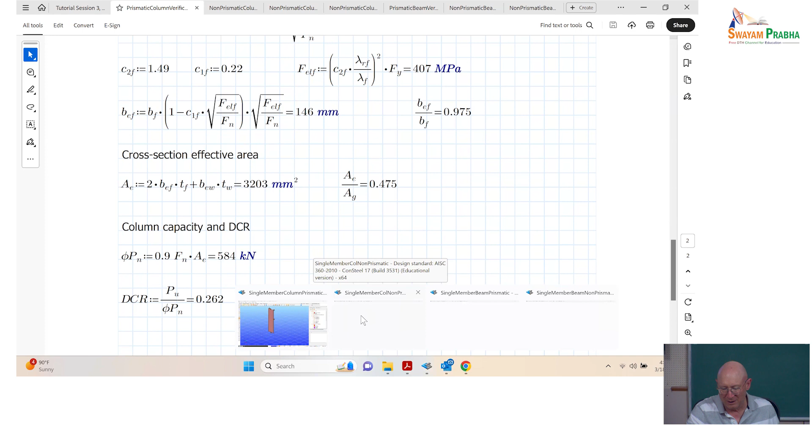So let's do the non-prismatic column. Balint is going to show later how we can introduce a taper, but I can go to a function and say I want to make this web tapered from one dimension. In this case, it's 300 millimeters total depth at the bottom, linearly tapered up to 1,000 millimeters total depth at the top. But then all the other cross-section dimensions are what we just did.

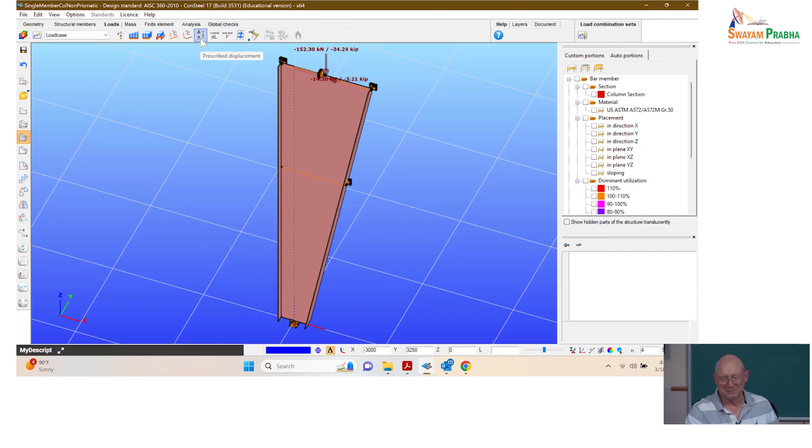So what do you think? Do you think the flexural buckling out of plane on this is going to change significantly? Any bets? Now you can see up at the top, just to make sure I had a concentric axial compression along the inclined centroidal axis, I gave it a component x and z for the applied load at the top. What do you think? Is the buckling load going to be larger, smaller, or the same? Larger. Larger. Let's see, so we'll run it.

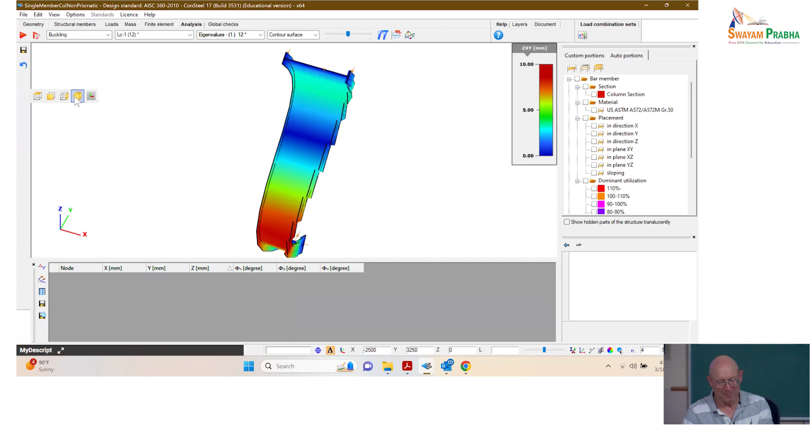Buckling: 12. It was 11.97 before. But what's 0.03 among friends, right? Let me pick the right one there, and we tone the S shape down a little bit. Pretty much the same sort of buckling that we were just looking at, right? It's just now it's got a tapered web depth.

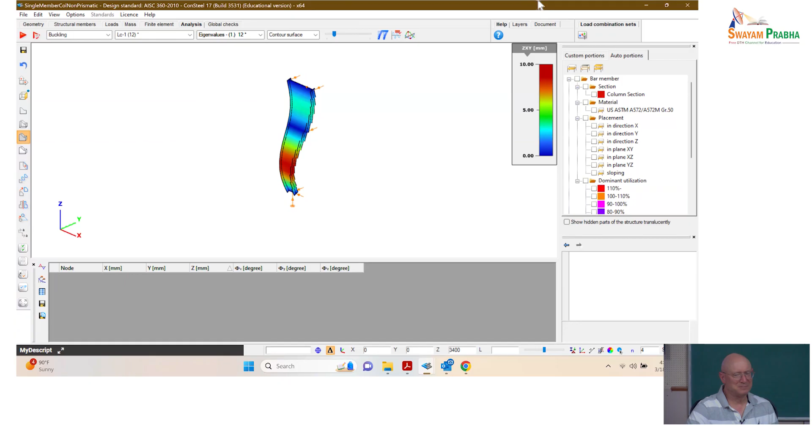Okay, so elastic buckling is pretty much the same. So now let's go to the non-prismatic column top verification. All right, so we can do this one really quick. If you pull up that file, non-prismatic column top verification, everything kind of looks the same because I'm doing the top.

Now remember the concept that I pitched to you that we're using in Design Guide 25, the AISC MBMA Design Guide 25, and we're using this concept also with some of the things moving forward to promote non-prismatic member design verifications in the 2027 ballot 2.

The idea is, suppose that you are doing a buckling analysis to verify your design on some structure that had several columns. Now, if you apply the load and do the buckling analysis, you can say, well, what's the load in each of those columns at buckling, right? That's your P critical, or your PE, if you like.

All right, and then you'd say, okay, now I'm ready to check each of those columns. I can say, well, what's the cross-section demand, a PU to a cross-section strength? We'll talk about that here in a bit. Actually, let me come back — it may be good to talk about that here if I don't have it there. Okay, we'll come back to it over here.

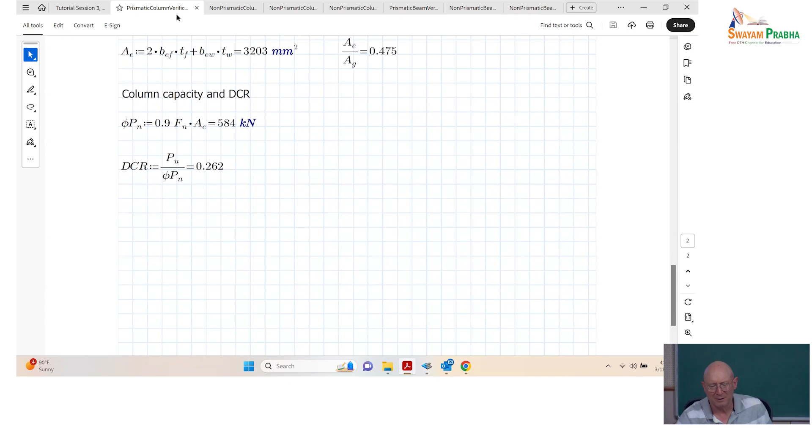So for each column now, I've got an elastic buckling load, I've got a PU, and I've got some sort of a cross-section strength that I can quantify in terms of axial load. If you've got all those, you've got everything you need to determine a PU over PN, the design demand to capacity ratio for the member, for each member.

So what are we doing when we have a non-prismatic column check? We're simply saying, okay, I've got this cross-section up there, I've got this buckling load — let me treat that cross-section. I've got my PU to cross-section strength at that cross-section, and I've got an elastic buckling load level, or a gamma E if you wish.

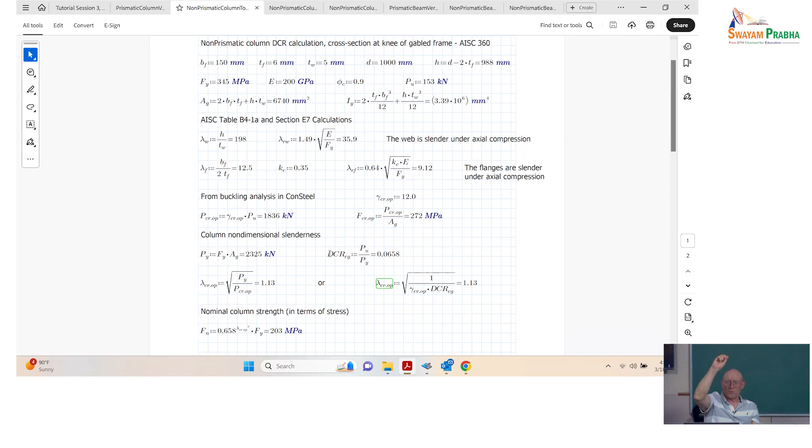And so now I treat that cross-section as if it's a member, and say, okay, I go to the spec and say I want to know what the strength is of an equivalent prismatic member that has that cross-section, that PU, and that gamma E, or gamma critical. Okay, well, I've got that one, and I can move down — let me check this other one down here.

And so generally, in Design Guide 25, it basically says here are several locations that you should check, and you look for whichever one gives you the largest PU over PN. Well, it's just like your column design when you design multiple columns in a building — if you're checking all axial loads, you'd check them all and say, oh, that column over there is most critical. So you're just treating a non-prismatic member like multiple columns.

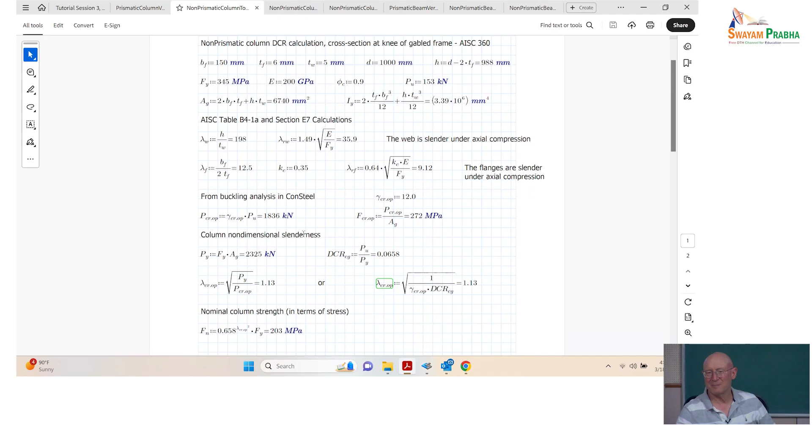Okay, so we went to the top here, but the top cross-section is the same cross-section we were just working on. So nothing changes, except our gamma critical is 12 instead of 11.97. Everything is practically the same all the way through the bottom. So we've got our checks getting down to our demand to capacity ratio here, pretty much the same to 3 significant digits.

All right, so then now here I'm showing a cross-section check. Now what we came up with and worked with Balint and his colleagues at Consteel — and they implemented it in Consteel — okay, can we identify what the most critical cross-section is?

So one way of doing that, it's not exact, but it gets you a reasonable estimate in general. We basically say, okay, let's do it the same way Eurocode does. We're going to calculate effective widths based on yield of the plate. So that's what you see here.

You see you're getting smaller effective widths because you're taking it all the way up to yield. Let's get an effective section for the S for section. That would be my effective section if I were taking the cross section all the way up to yield. Then I can see now effective area over gross area, my goodness, that's less than 50% of the gross area. This is crazy. And then I can do a phi PNS for a cross section, 0.9 FY times effective area.

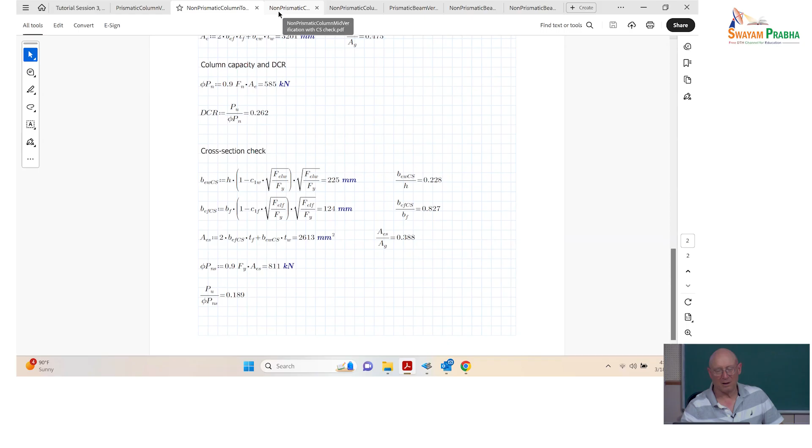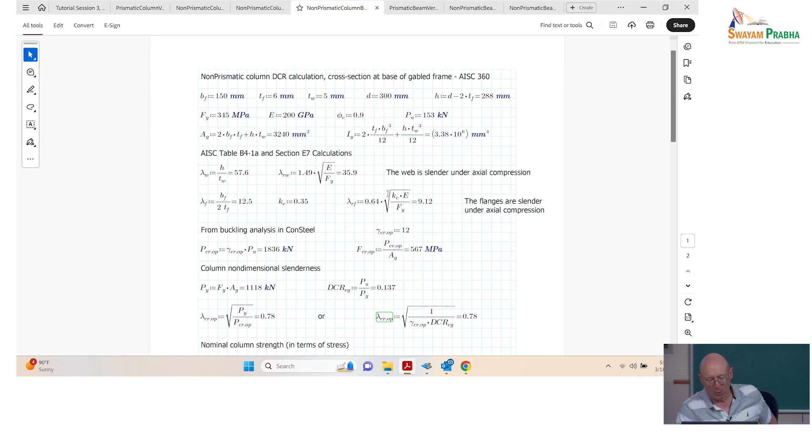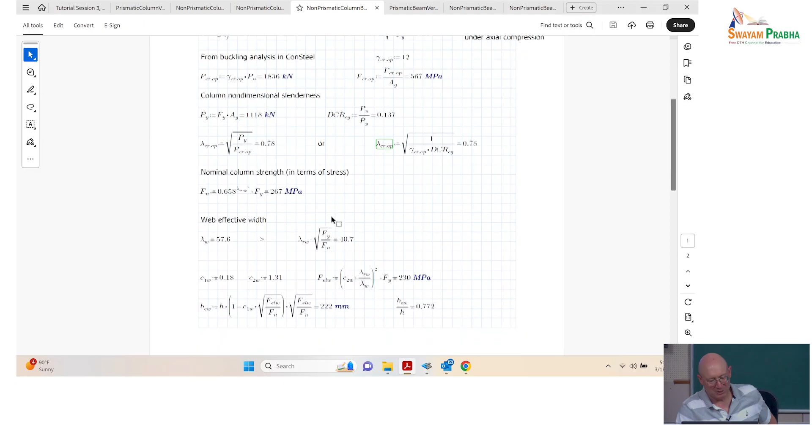Okay, so again, if we're using ConSteel, we would just go straight to the bottom. So I went to the bottom here, and now at the bottom, D is just 300 millimeters. That changes, but everything else is largely the same. The gamma critical is 12 for the out of plane. We just carry everything through. The calculations are exactly the same, but we're doing it with a total depth of 300, and we get 0.233 at the bottom.

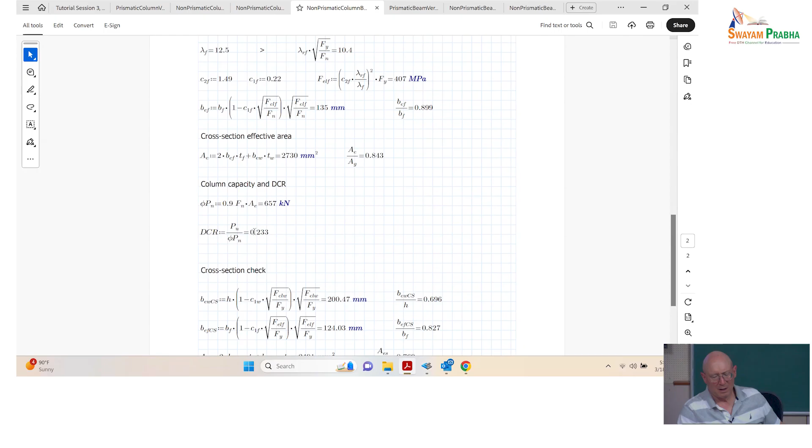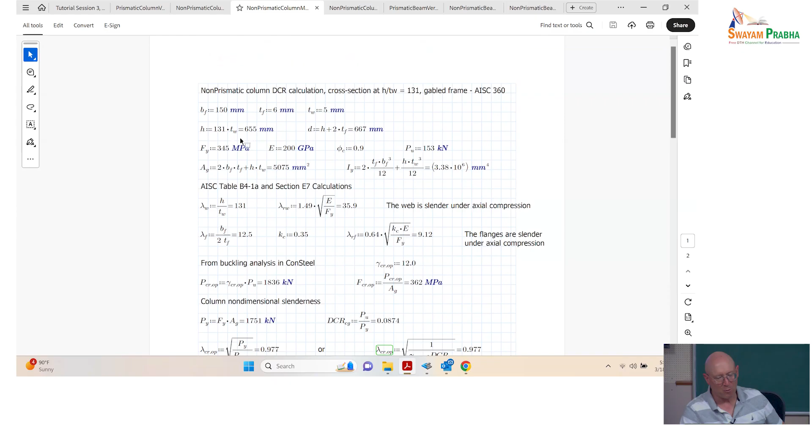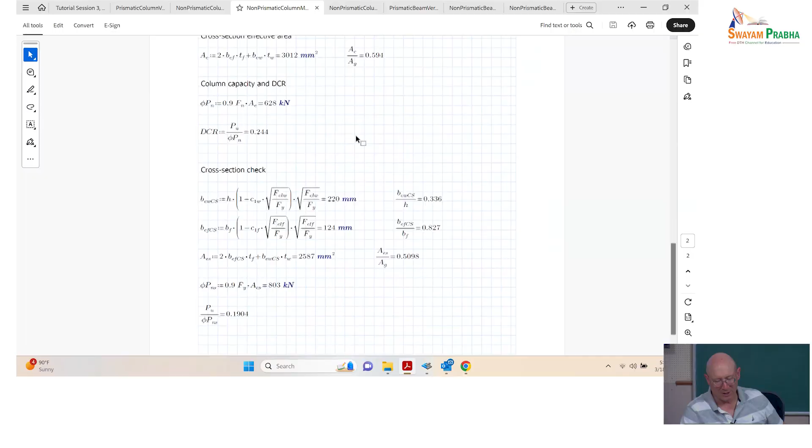And so in Design Guide 25, we'd say, okay, well, that one wasn't the most critical. We'll use the section at the top. But generally, we need to check also in Design Guide 25 where H over TW passes through 131. So I did one other check for an intermediate point where I said H is 131 TW. What's the depth? So let's check that particular location along the length. And when we do that check, same calculations, okay, 0.244, that's a little bit larger.

Did that confuse you? So that's the column checks. I see some frowns. Yesterday you were all nodding yes. We're good? Okay. All right.

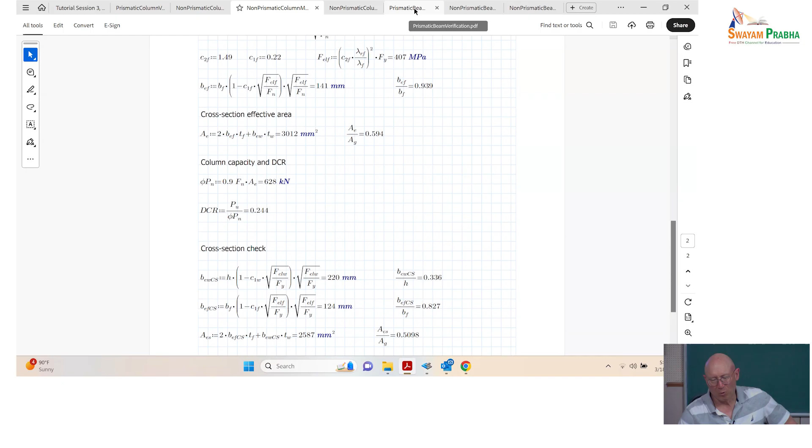Now to wrap up this session, I want us to talk about the beam checks. So if we're wanting to get a demand to capacity ratio for flexure, it's very similar concepts. But of course the equations are different.

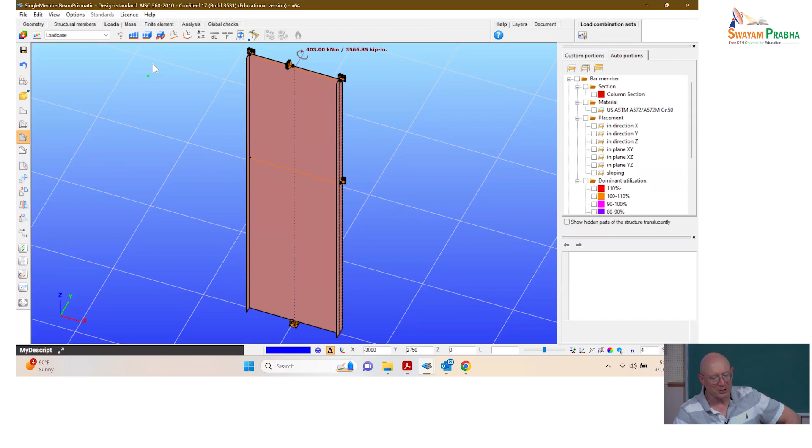Let me see if I pulled that up. Yeah, I've got it. Single member prismatic beam. So I've got 403 kilonewton meters applied as a moment at the top, same geometry, basically using the cross section at the top. We can run the analysis, look at buckling, on the buckling mode down there a bit.

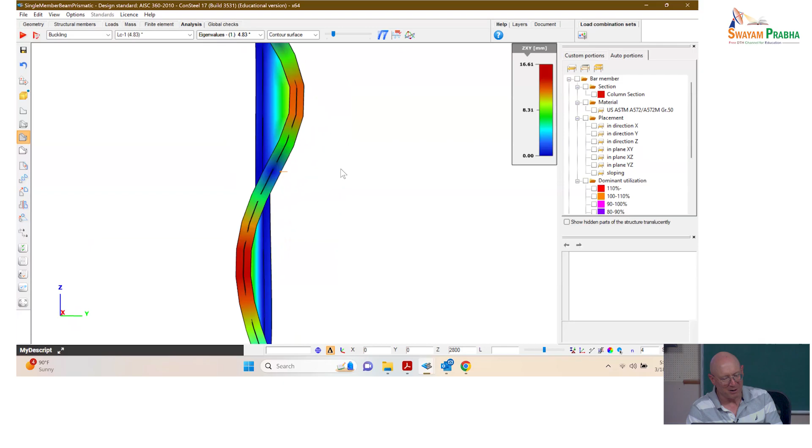So what's going on here? Which flange is in compression, in flexural compression? The one to the right, correct? We can see that, here we've got a moment diagram that's varying from maximum at the top linearly to 0 at the bottom. So we've got high moment up in that 1.5 meter long top segment, and then smaller moment in the bottom segment.

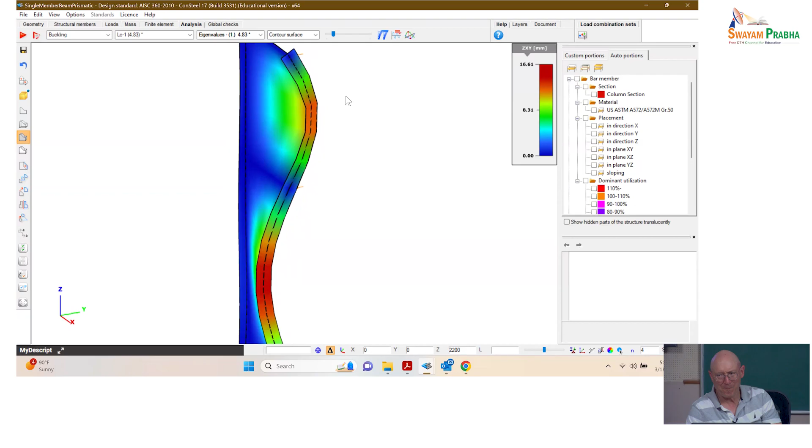And the eigenvalue here is 4.83. So we're going to take that in a kind of similar concept.

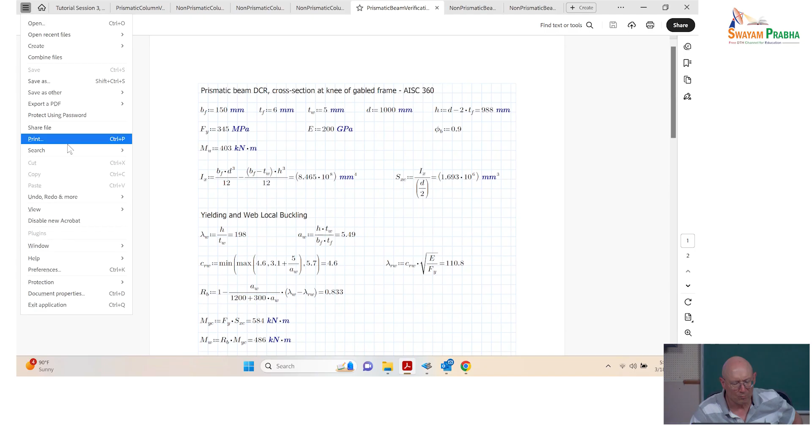If you're guessing that the critical cross-section for bending is probably at the top, that's a pretty good guess, and we could do multiple checks. I think I actually put in one non-prismatic beam. Oh, that's non-prismatic, this is prismatic. So yeah, clearly the maximum moment is at the top. It's the same section throughout, and the top cross-section has the biggest cross-section demand, right?

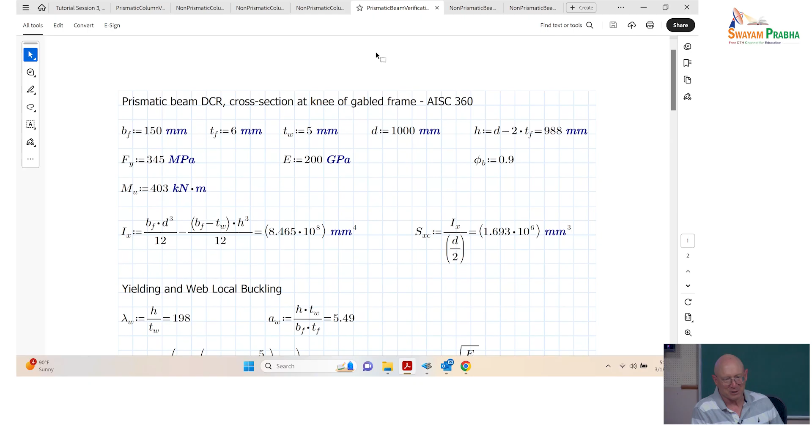So we're just calculating a few miscellaneous parameters here: moment of inertia, elastic section modulus. So now getting into the flexural provisions that I shared with you yesterday.

So this is doubly symmetric again, and so H sub C is equal to H if it's doubly symmetric. H is the distance between the insides of the flanges for a welded section, so 198 again. Then we have an A sub W parameter that, in this case, gives the ratio of the area of the web to the area of the compression flange.

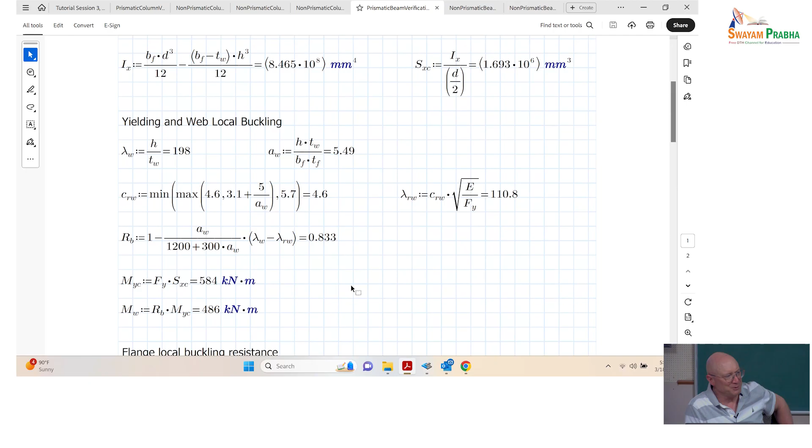So that's 5.49. You think that's a big number? 5.49 is a very big number for this, this is a huge web. Dr. Galambos used to call these webs with top and bottom stiffeners. There's a small flange with this huge, deep, slender web. Okay?

What's that? Galambos, the Hungarian. Galambos, yes, as a proud Hungarian, Dr. Vasilievich, did I say that fast enough to get through it? Vasilievich, yeah, right. And I screw up all your Indian names too, I'm sorry. Anyway...

From Dr. Lakshmi Priya's work, we recognize that once we're getting into some of these sections, the slender web, or the non-compact web limit, where it goes from non-compact web to slender web for flexure, or class 3 to class 4 if you're thinking more in terms of Indian standard or Eurocode standard, it's the very small flange, very large web tending to be damaging, and we need some reduction in that.

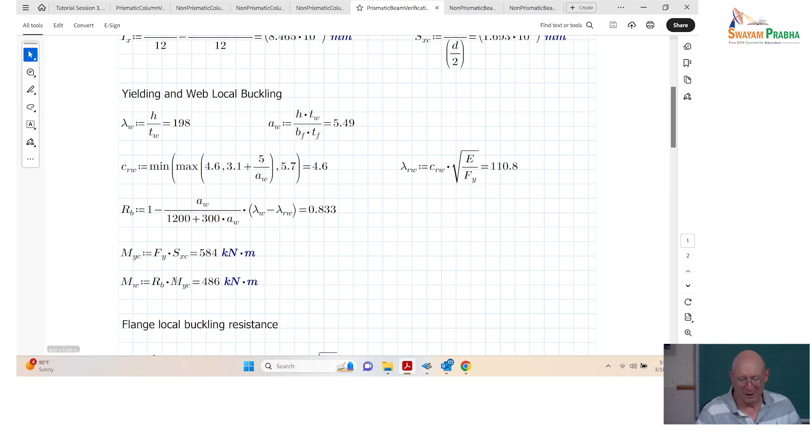R sub B in the new provisions is essentially the same equation as what's listed as RPG in the current 2022 specification that you have. PG was for plate girder, and then we basically said, oh well, you could have a plate girder that's got a really stocky web, so why are we calling it plate girder? It's a slender web member. And Dr. Yura and Dr. Galambos would never let us change that because people are used to seeing RPG, but I managed to sneak this in when nobody was looking, in the latest version of the ballot for AISC.

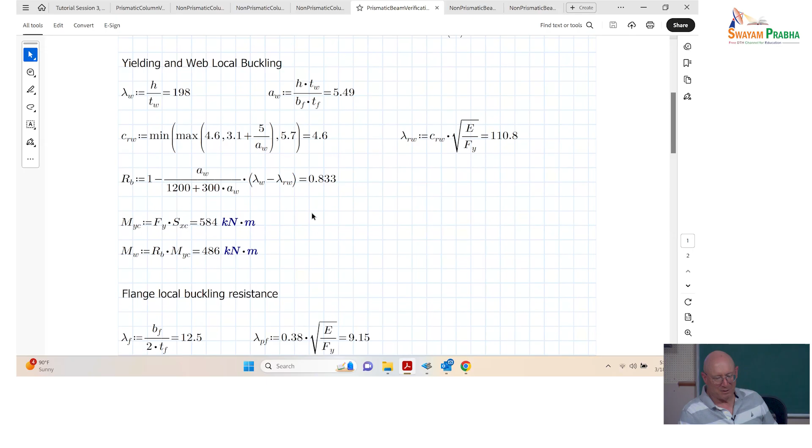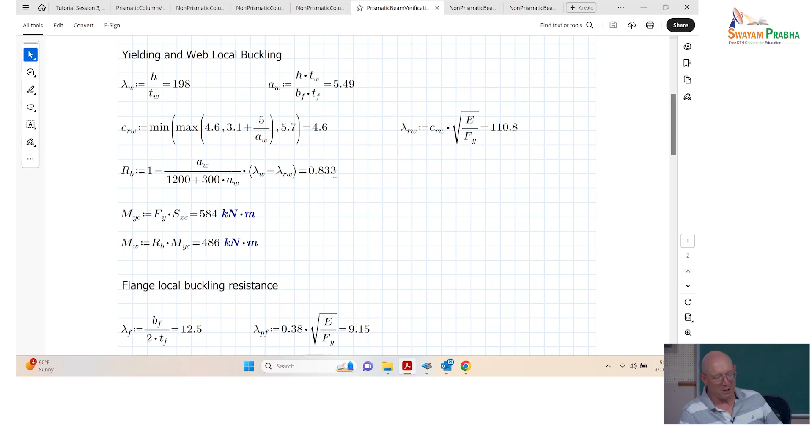So the reduction on the yield moment accounting for post-buckling strength of the web here is 0.833. So that's a fairly large reduction, relatively speaking, but it's a very thin web.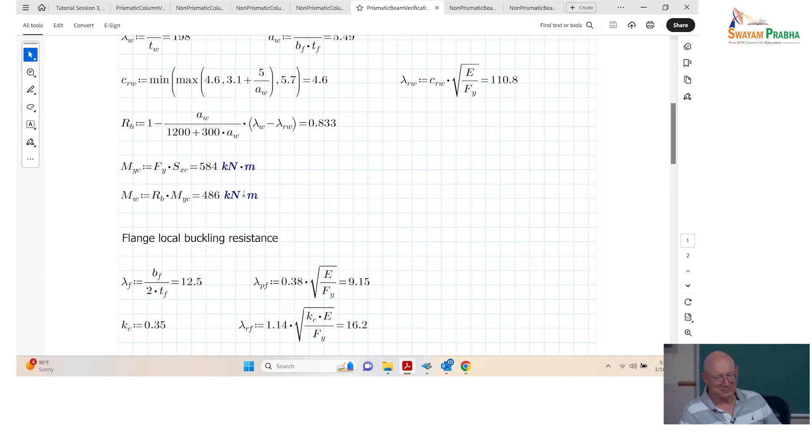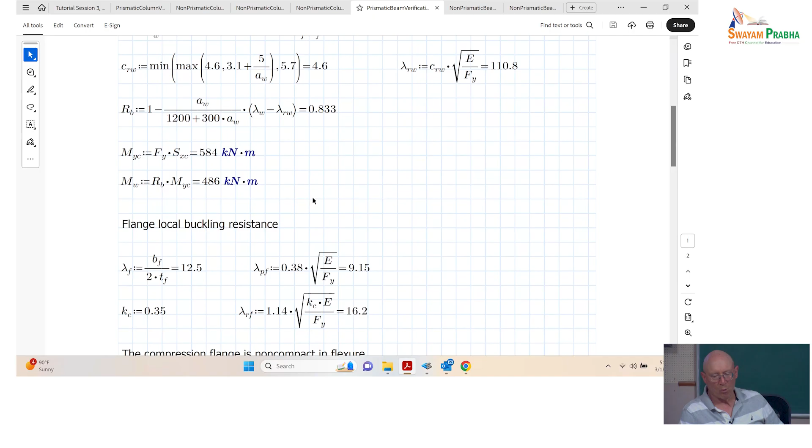We can calculate the yield moment to the compression flange, and then this term M sub W is kind of like a cross-section strength. It's called the strength considering yielding and web local buckling. So here, that's what it is, yielding and web local buckling. The web local buckling and post-buckling is captured through RB, and so that's your so-called plateau strength. That's the maximum limit that we can use in our design. We reduce from that when we look at lateral torsional buckling or flange local buckling.

All right, so now we need a flange local buckling resistance if this flange is class 3 or class 4. The compact limit in AISC, which is equivalent to class 2 in Indian code and Eurocode, we take 12, that would be 12.5 for this case. No, that's actually the actual B over 2T.

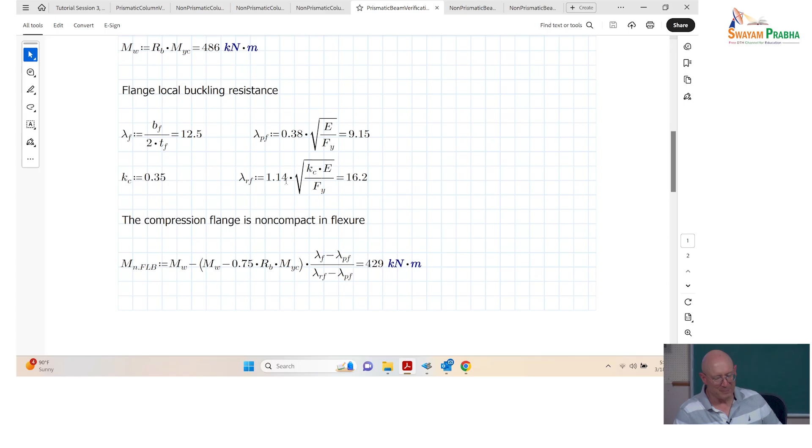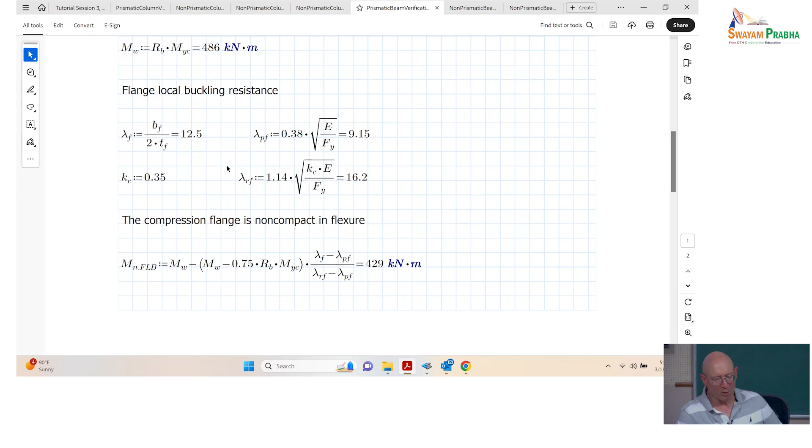The compact limit is 9.15, and so we're exceeding the compact limit, but the non-compact limit is given by this equation for flexure. KC is 0.35, that's 16.2, so we basically have a non-compact flange, or essentially class 3 in Eurocode or Indian code. And so the equation that is moving forward in the ballot at AISC for the flange local buckling strength is what you see here.

It's basically a linear reduction all the way out. There is basically a check that you'll never practically reach, where you basically say I'm not going to allow that line to go less than the elastic buckling strength, but you'd have to have something really, really silly before you'd ever get there.

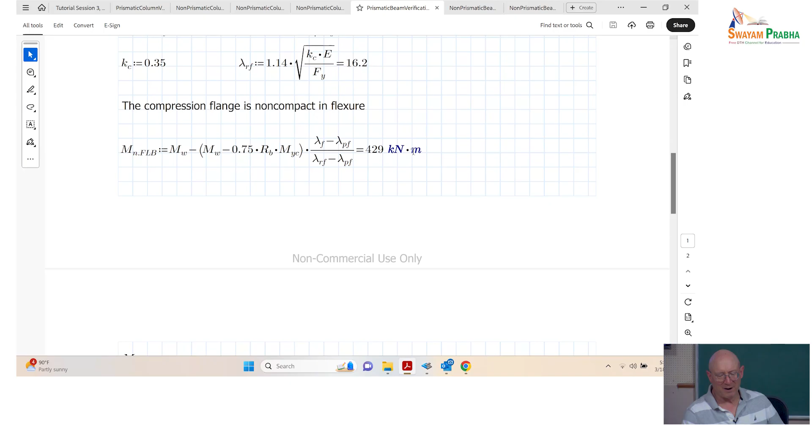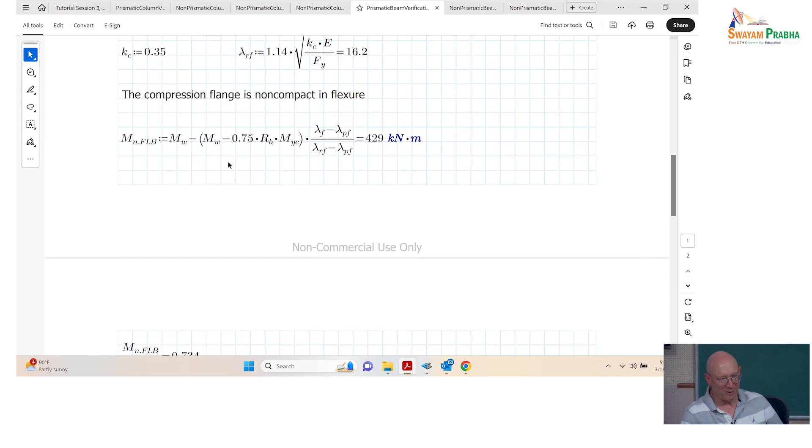So 429 is the flange local buckling resistance, and that gives some accounting, in a very simplistic way, for post-buckling strength of the flanges in flexure. You can see we're at 0.734 of the yield moment at the flange local buckling strength.

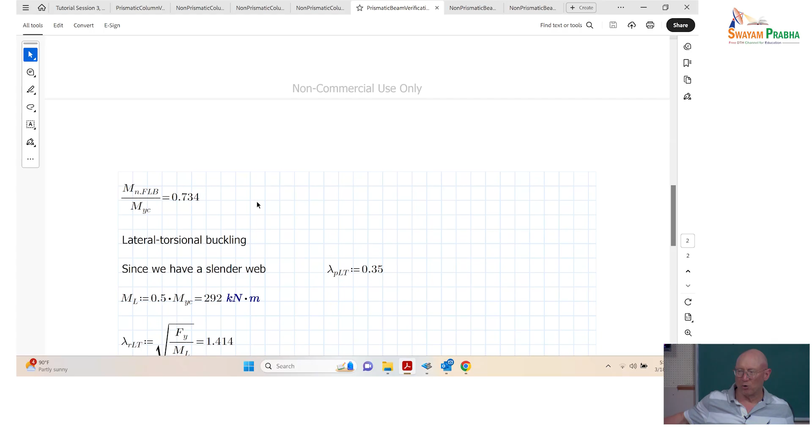Now in the AISC provisions, flange local buckling is handled as an independent limit. So you do lateral torsional buckling, you do flange local buckling, and if you're short enough for your unbraced length, flange local buckling might take over at something less than the plateau strength for lateral torsional buckling.

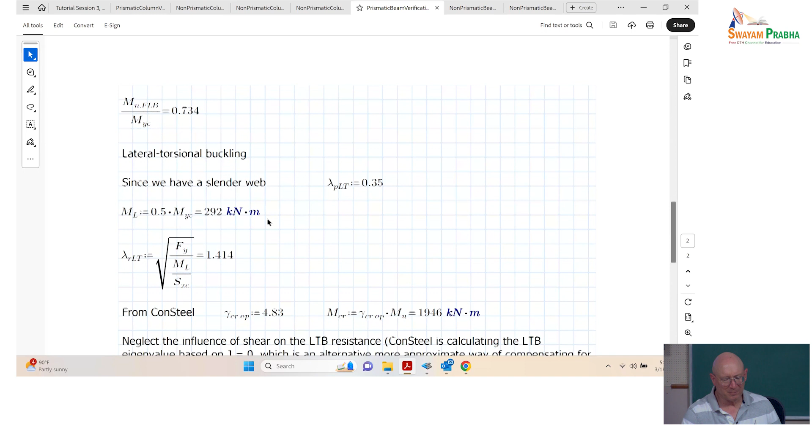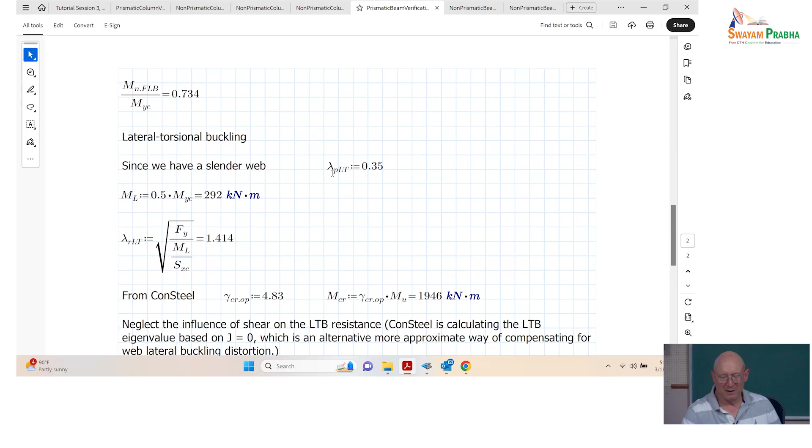So here, let's look at lateral torsional buckling. We have a slender web, and things get relatively simple in some respects. The lambda P limit, which gives us the width of the plateau strength, is a constant regardless of any moment gradient for a slender web section: 0.35. This is exactly the way it's been in Design Guide 25 and the way it's been programmed in ConSteel.

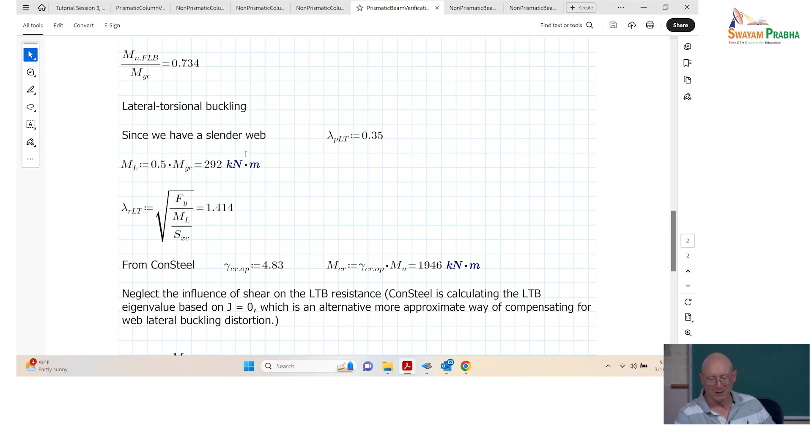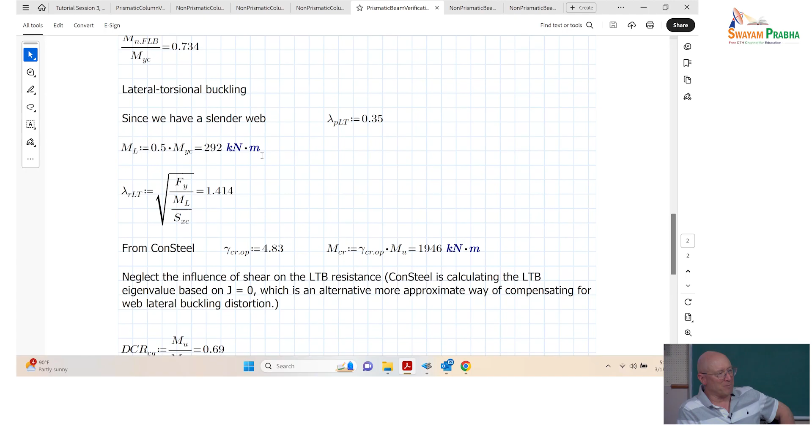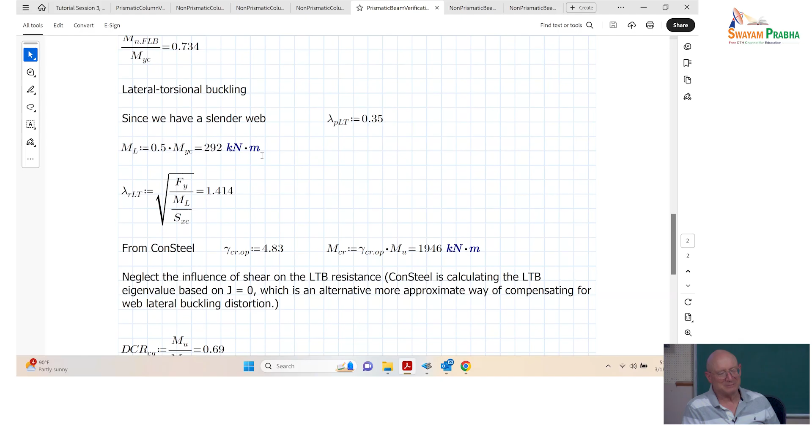The moment at which we consider that we transition from elastic lateral torsional buckling to inelastic has been lowered, however. It's 0.7 MY in the 2022 standard, but we argued until we were blue in the face, saying look, here are all these experimental results, it's saying that's going too far. This goes all the way back—Lakshmi and I were arguing with folks about this back at the beginning of time. I think we finally have some traction where that reduced ML is moving forward in the standard.

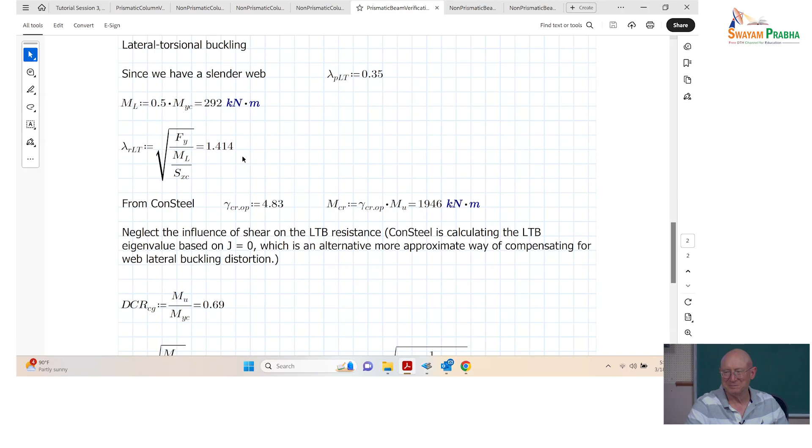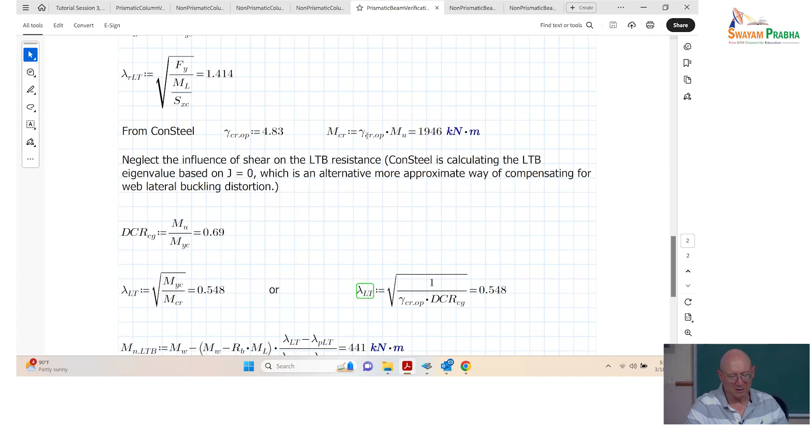And so lambda R LT, if you look at how that's working, that's really just square root of Fy over the elastic buckling stress at lambda RLT. So that's 1.414, basically square root of 1 over 0.5, or square root of 2 in this case. We had the 4.83 from ConSteel for the lateral torsional buckling, so we multiply mu by our elastic eigenvalue to get to the moment at the top of the column at elastic buckling.

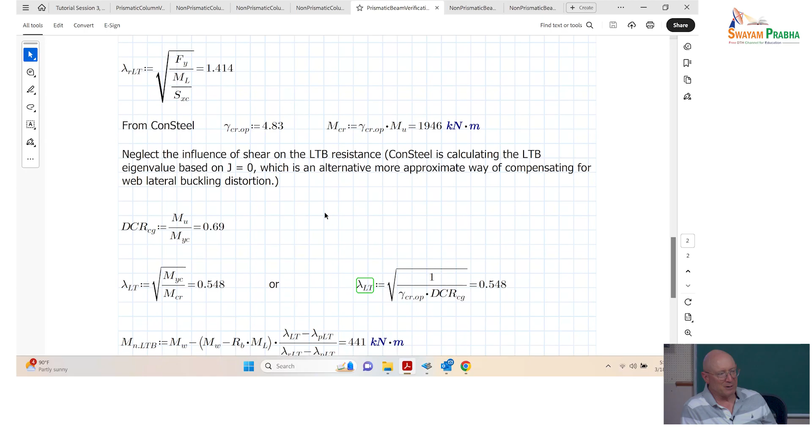Now, if you caught what I was showing you last Thursday night, or what I showed you yesterday with the flexural provisions that are moving forward, in the current AISC specification, if it's a slender web, we calculate lateral torsional buckling strengths taking J equal to 0. We don't account for any contribution from St. Venant torsion. I think AISC and the U.S. bridge standard are the only ones in the world doing that.

We're moving away from that, to always calculating the elastic buckling resistance with both St. Venant torsion resistance, GJ—or GIT for you, is that right? And G is the shear modulus, is that right? And the warping rigidity, we call it ECW, you call it EIW, is that right? Okay, so all those terms go in, and we calculate the strength.

The painful side, I think, in many situations, is we need to do some extra work to calculate another reduction factor, because we've seen from analytical work—validated somewhat by experimental testing, though that testing has been mainly inelastic lateral torsional buckling—that the distortion of the web, exacerbated by shear, can be a significant factor in reducing your elastic lateral torsional buckling strength. My colleagues at UT Austin have done a lot of good analytical work to come up with a factor to address that. It's called CMV.

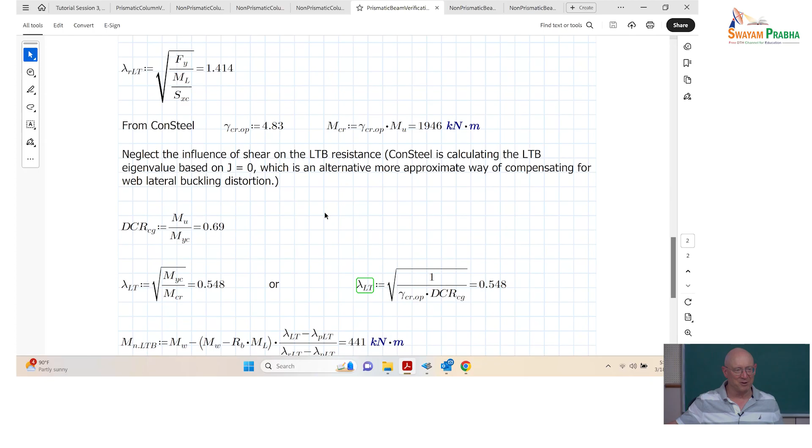I think it's better if you have something like you're checking an erection scenario and it's super long. The St. Venant torsion can help you quite a bit there, but if you've erected something super long, it's kind of deflecting like a spaghetti noodle anyway, so you need to be careful either way.

All right, so I think we're just about to wrap up. I want to do this, and then we can do a quick run through of how we do non-prismatic, and then we'll take a break.

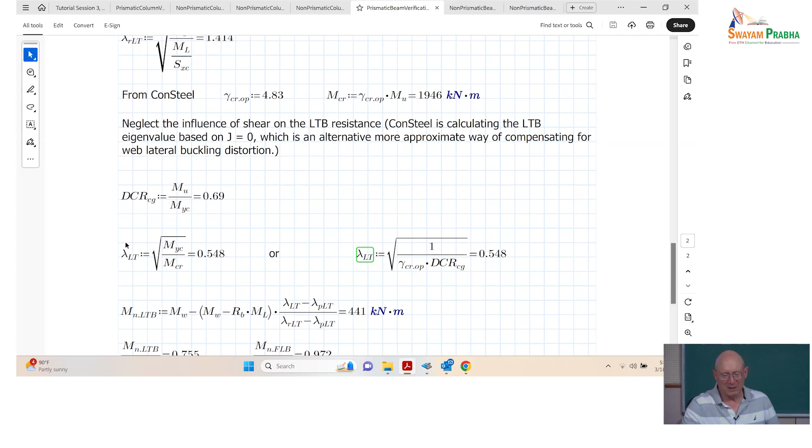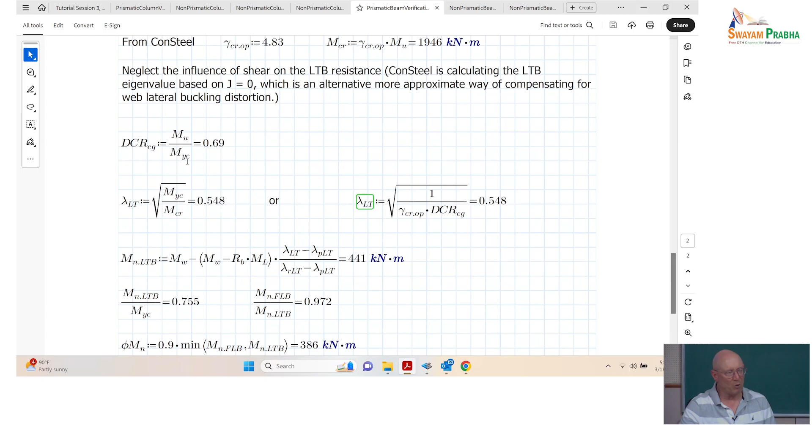So here we have a gross cross-section DCR that we're going to calculate. That's 0.69, and so we use that to get a lambda LT, square root of My to the compression flange over elastic buckling moment, or we can write it as FYC over Fy of the compression flange divided by elastic buckling stress. Same deal. Or, in general, we write it as 1 over the elastic buckling eigenvalue over the demand to capacity ratio for the gross cross section, mu to my. So 0.548 is where we are for both. Remember, 0.35 is plateau for a slender web section.

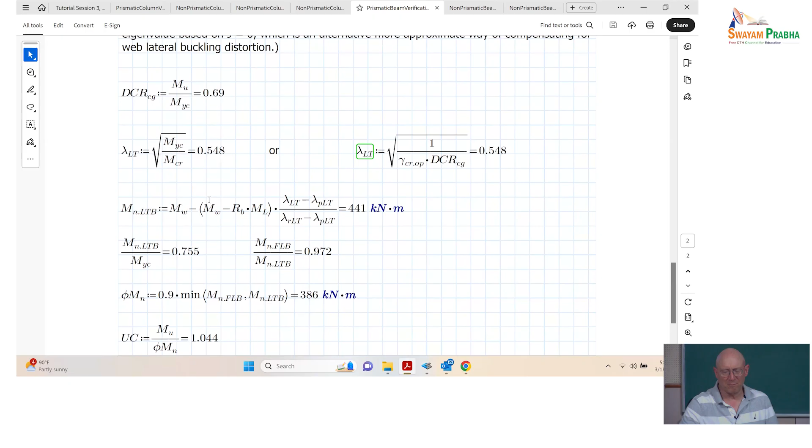So here's the LTB equation. We got 441 kilonewton meters, so 75.5% of the yield moment. And we can see the flange local buckling here is about 3% smaller than the lateral torsional buckling moment. So that's our lateral torsional buckling moment, but we basically chop it off at the neck and say no, you can't get that high. Flange local buckling governs, and so the phi-mn is the smaller of those two, 0.9 times the smaller of those two, 386. And so you can see here now, oh, we're already over with moment, about 4% over. All right, so any questions there?

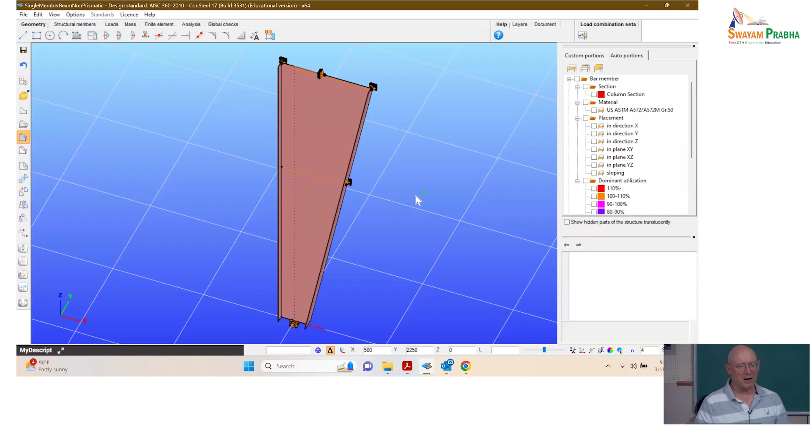So the next file is non-prismatic beam top verification. If we go to the ConSteel solution here, I've now tapered the web, 1,000 deep at the top, 300 deep at the bottom. We're going to apply our moment here. 403 is the moment that we need to design for, and we'll scale that down a little bit to the buckling calculation.

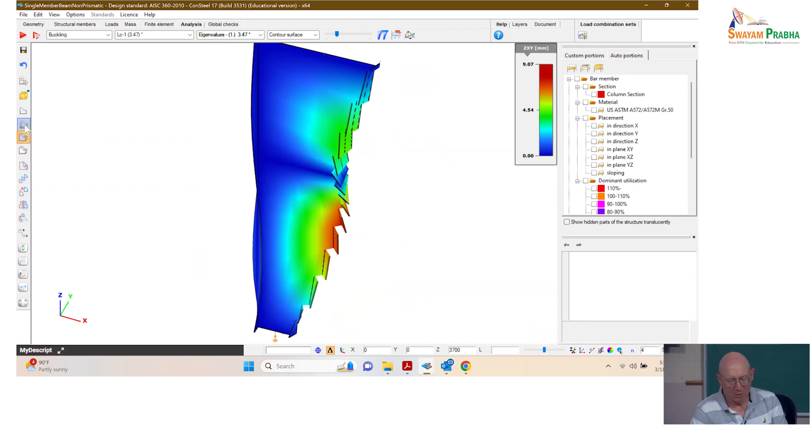And turn that off so we can see the member better. So this is showing basically how things deform in our hidden line view. If we go to just a wireframe view, we can kind of see how the cross sections are moving there with the lateral torsional buckling. Maybe that's a little easier to see.

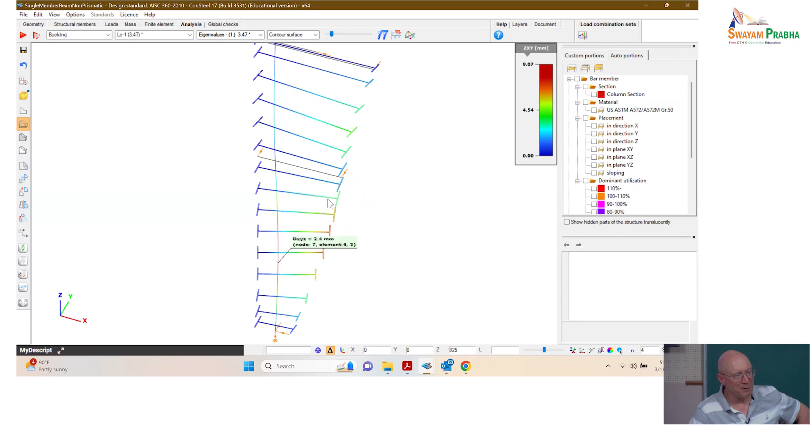And the buckling load went down. So this shallow depth in the bottom is hurting us in terms of elastic lateral torsional buckling strength.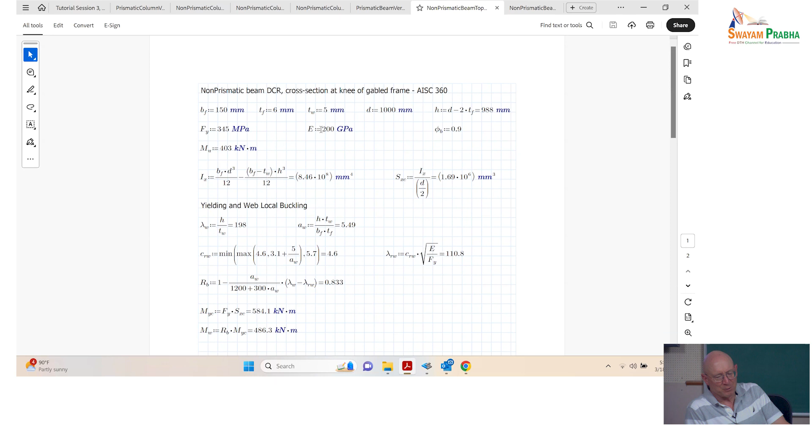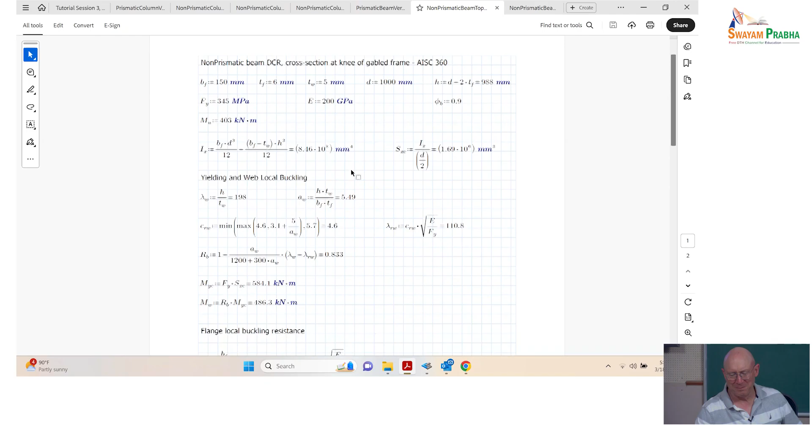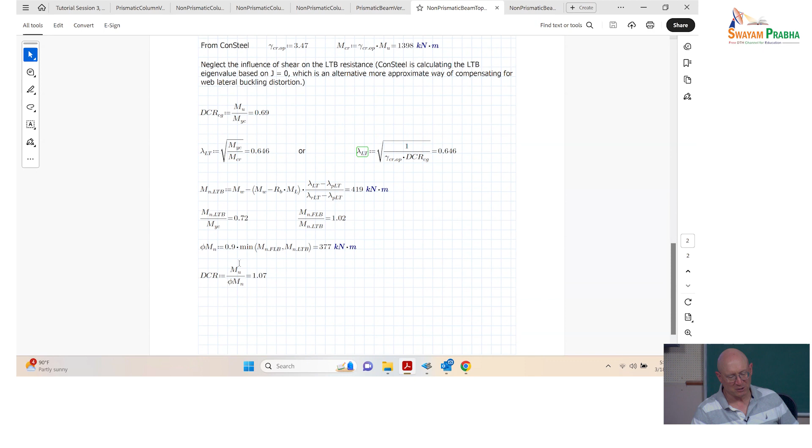All right, so let's basically say, let's suppose that we'll figure that the top is the most critical. So it's the same cross section we were just working with on the prismatic member I just showed you. So this file is largely the same, except when we get down here to gamma critical for out of plane, it's 3.47 now. So it's reduced from what we had for the prismatic member. And then if we scroll down, the demand to capacity ratio for the member is 1.07, where it was essentially 1.04 before. And I thought I did, maybe I thought I did something and then forgot and didn't do it.

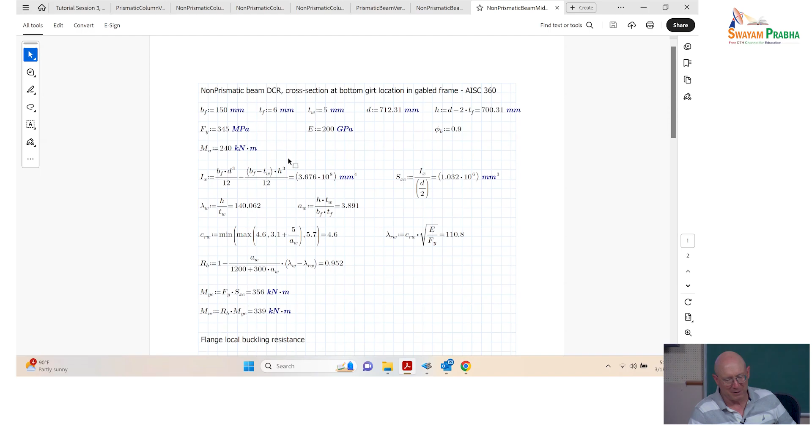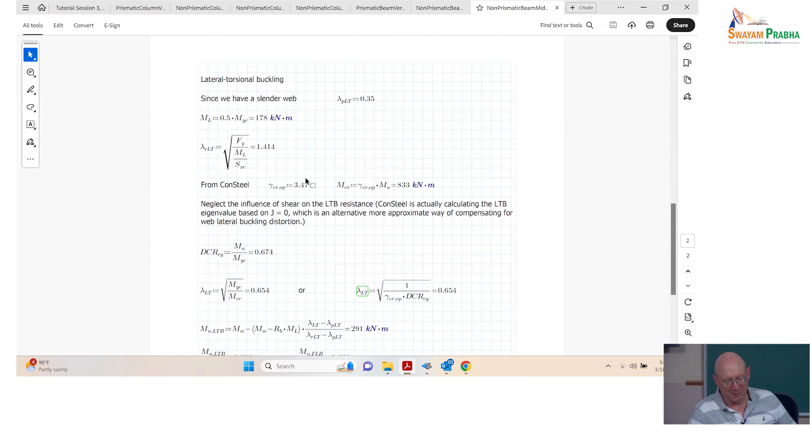Just for a quick illustration, taking more of the Design Guide 25 approach, let me check the cross section at the girt. How do things look there? My H is 700.31 for the depth of the web at the girt. If we work through everything, it's the same calculations, but just done with the shallower web. Same gamma critical. So what are we doing? We're saying, the simplest way to put it, I want to check the strength of an equivalent prismatic beam that has the same MU to MW as this cross section, and has the same gamma critical. So that prismatic beam is now a surrogate for checking where am I here at this middle cross section. Just did the same thing for the top.

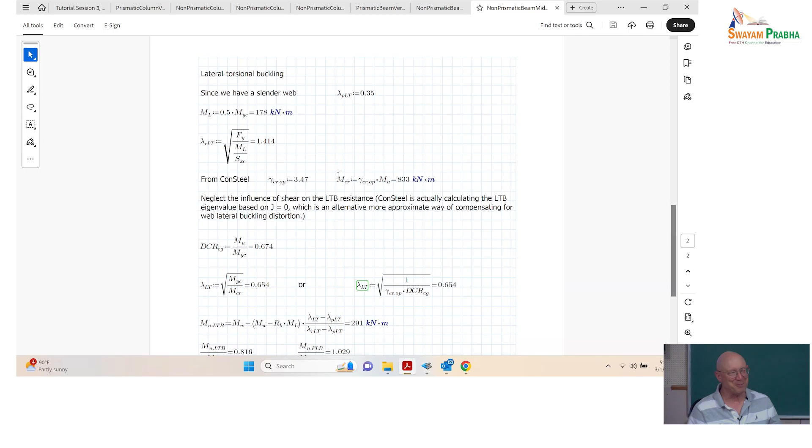Obviously, if we go at the bottom, the moment is 0 at the bottom, so there's no need to check the bottom, right? So that's all this is doing. Oh, I get 0.918 here at this section.

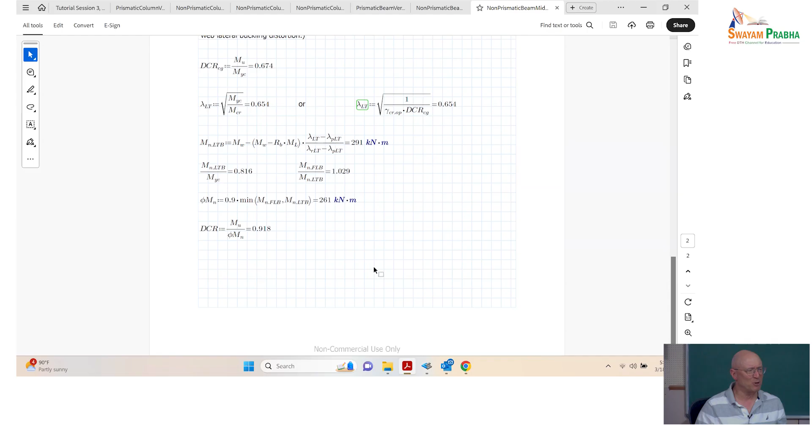Now, oh, okay, I know why I didn't. So when we do the calculations in Consteel, if we were just checking moment, we look for where is MU to, essentially MU over phi MW, where is that largest? That we identified it as our critical cross section. That's where we do our calculation. That usually does pretty good for beams because of some of the silliness of the way RB works with the equations. You can sometimes get other cross sections that actually give you a little bit larger demand to capacity ratio for the member checks, but it's not significantly different.

All right, so that's pretty much, hopefully that makes what I think you've been puzzling with about notation maybe a little bit better, with how do we apply these things to do design verifications. There we just kind of did it multiple times. That's the nice thing of having non-prismatic checks, is you have to keep doing them over and over and over and over, and then you put it into some software and have it do it, right?